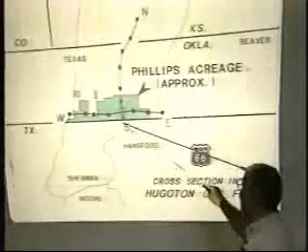This is a schematic of the Phillips acreage in the Oklahoma Hugoton. This is the Texas-Oklahoma line here, and this is the Oklahoma-Kansas line. The green colored area here is the Phillips acreage.

The geologists and log analysts ran some cross sections east to west and north to south, normally following a path where there are a lot of deep wells drilled in the region. So we picked a lot of areas because the deep wells had modern logs available on them. A lot of these other wells were drilled in 1945 and they virtually didn't run any of the modern suites of logs, so if we're going to do our work, we need something reasonable.

This is the region that we picked for our 12-section model study, about in the center of our acreage, plus the 12 sections, plus the sections all the way around had deep wells drilled on them. So we had logs available on all of the sections. We went one section on either side too, so you get to do the correlation work with regard to layering and so on and so forth.

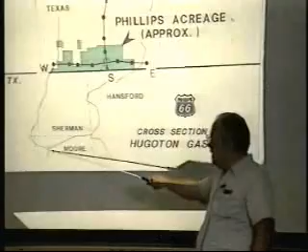This is approximately the end of the Texas Hugoton field. We'll get into that just a little bit. And then this dividing line, you get into the West Panhandle, which is also about the same age, and it's one giant reservoir where the oil rim has produced well over a couple billion barrels of oil, and the gas in place between the West Panhandle and the Hugotons into Kansas was over 70 trillion cubic feet.

I remember one day I tested a well down in the East Panhandle, and I had to test one up over at the Kansas line. I had to drive 250 miles. You get to test, and you have to get a couple of wells off test in the same day. It's that big.

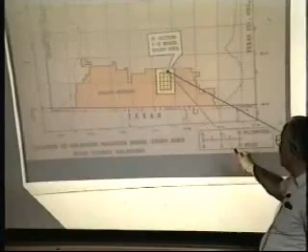I don't know if this is going to show up with the camera, but this is a little more descriptive of the 12-section study area. This is the region we studied with a model, but we also utilized data from a section all the way around. We also took a look at things being dominated primarily by the more permeable layer, and we checked the flow rates between wells on either side to make sure that the no-flow boundary was very close to the 12-section study area. I think it was about 1% off in total volume.

So the very first thing anybody's going to ask is, yeah, but if one well is no good, why is 12 good? Why shouldn't you study the whole field? It'd be impossible. But we did take a look at the no-flow boundaries by proportioning producing rates of offset wells, and it approximately confined it to the 12 sections.

This is a north-south cross-section from the Texas-Oklahoma line up across the Oklahoma-Kansas line, because we wanted to establish how much different the reservoir is in Kansas than in Oklahoma. The infill drilling was approved there, and we wanted to see if we could apply those results to Oklahoma. We knew that if we went to hearing and lost in Oklahoma, we'd have to go into Texas next, then the West Panhandle, then the Permian Basin, then the Gulf Coast—there was no end to it. This is why we got involved.

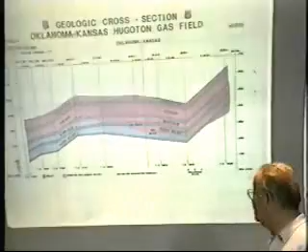The structure goes up into Kansas, so the layers extend up from Oklahoma. The Phillips acreage is down through here—there's approximately the Phillips acreage. As you can see, when we get down into our part, the Herington, the Krider, and a little bit of the Winfield have gas, about 5 feet. Every well we drilled, we tried to make a completion in the Winfield.

We perforated and did a light acid wash. If we got dry gas, we'd complete it. Ordinarily, when you acidize in there, you usually get water also, so we plugged it. But in our 12-section study area, 3 of the 12 wells were originally completed in the Winfield.

When you get into Kansas, some of these layers, like the Winfield, are completely dry, and then you get into the Fort Riley. What also happened in Kansas is the Herington up there—they never even perforated it, they didn't consider it pay. But the Fort Riley turned out to be their low perm layer. So they had their low perm layer on the bottom, and we had our low perm layer on top, which is the Herington here.

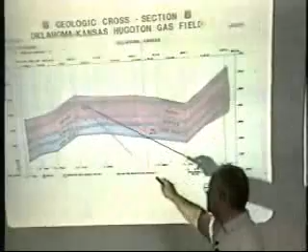The Krider is a good quality reservoir rock clear across Texas, Oklahoma, and Kansas, and even down into the West Panhandle, where they refer to it as the brown dolomite, which is also the best quality reservoir rock.

When you look at all these wells, remember, what would you have done in 1945 when you had maybe a dozen wells drilled in a confined area? This covers about 30 to 40 miles wide and about 50 miles long, and you've only got a few wells.

How are you going to assume that this shale—which now we have all drilled and can correlate on logs—was continuous everywhere? You could say, well, since I don't have that information, I'm not going to assume it. But when are you ever going to have that information except after it's all drilled and developed? This is why, in my opinion, you're obligated to make the assumption: I'm going to forecast this reservoir with the assumption of no crossflow, and see how bad it is.

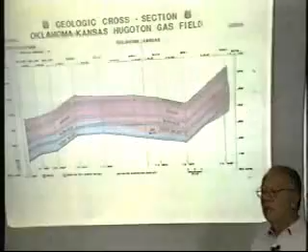It's not necessarily a disaster. Remember, it's the ratio of those two. It might turn out it doesn't make any difference, but as a reservoir engineer, I think you're obligated, particularly when you start to get involved and say you're going to improve your work by doing a sophisticated risk analysis approach to reservoir engineering.

Well, the risk is that there is no crossflow—that's the risk. And as you begin to study more and more reservoir performance, you find out that the majority of reservoirs have no crossflow. There's no crossflow. You can see that these shale barriers can be correlated across the whole field, all the way into Texas, Oklahoma, and Kansas. This is an east-west cross-section.

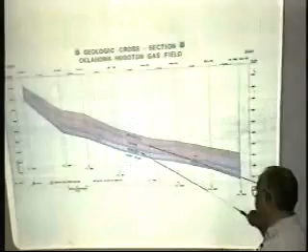You have the Oklahoma Hugoton field. You see we've got the Herington, the Krider, and a little bit of gas in the Winfield. I think there's an elevation difference here of about 900 feet. As you move in this direction, toward where the rocks start to get a lot of clastics in them, the quality of the reservoir starts to drop off. In through here, it's primarily carbonate, essentially dolomite.

When you go back and look at some of the testimony in Kansas, the geologists, in my opinion, were impartial in trying to do their work technically sound. You can see the same type of layering, and these black shale streaks correlate across the entire field. When you talk to geologists, they say this should be expected for carbonates.

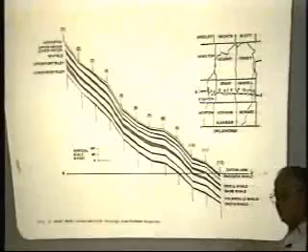It's a blanket deposition—it's cyclical, you don't always have the good limestone. You have some mudstones too in between. And again, 45 years, 300 pounds in one layer, 100 in the other. There is no crossflow. Zero. It's not small—it's zero.

There's a difference you have to remember. At one stage in reservoir simulation, everybody automatically used 0.1 as the crossflow factor, originally done to keep it numerically stable. When we took our gas model and tried to run it as a layered, no-crossflow model, it blew up. It wouldn't run, it couldn't handle backflow.

So you're creating numerical instabilities when you try to run these types of problems. I don't know if that was part of the issue or not, but we could not run the model in a layered, no-crossflow mode. It couldn't handle the backflow, and you can also get into trouble with a multi-phase system, like oil. So I'm sympathetic there.

But you ought to set up some runs with the gas, make some runs, play with it a little bit, and find out what's going on and how you can simulate the shut-in pressure. The shut-in pressure you're getting represents that of the more permeable layer, nothing else, and you can't extrapolate it.

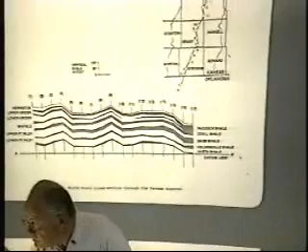This is nothing more than the cross-section. Looks like it's north-south on this one. Yeah, this is the north-south cross-section in Kansas. Well, they got one here, they show a little bit of a window, but you think, is your well over here going to see that window?

It's amazing what happens when you change a parameter in one well, in one layer, how it affects everything, everywhere all of a sudden. That was a big surprise too, because everything redistributes itself.

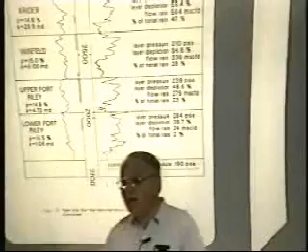Okay, here's an example of layer pressures obtained in Kansas by Mesa, Pickens. They're all for infill drilling, and they're all for getting a double allowable, because they really need the gas, really need the money right now.

Up in Kansas, the Krider—again, let's go through it methodically—the Krider, the Winfield, the upper Fort Riley, and the lower Fort Riley. The Krider has a layer pressure of 188 psi. The production log shows it's contributing about 47% of the production.

The layer depletion from the original shut-in pressure is 59% depleted. About 450 pounds was the original. The flow rate out of here was 564 MCF per day, which was 47% of the total rate producing from that well. The Winfield,

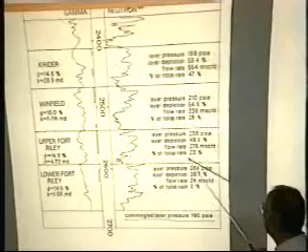210 psi—that's not a gas gradient, you can't get to that pressure on a gas gradient. Layer depletion about 55%, it's contributing 28%. The upper Fort Riley, 238 pounds, 23% of the total rate, about 48% depleted. And you get down into the lower Fort Riley, now it's only contributing 2%, and layer pressure is 284 pounds.

They haven't produced any gas from this well at all. They drilled an expendable well, went in there and took layer pressures and ran some flow meter surveys. So this is the pressure at a point, really, and there could be a gradient into that area. But this is only contributing 2% of the total.

This is their low perm layer, and you see the layer pressure here is 284 pounds compared to 188. So there's a 100 pound differential depletion, and again the original pressure is about 450. Well, they shut the well in then, after they ran all these, to get a commingled shut-in pressure. You get 190 pounds.

This pressure is invisible, that pressure is invisible, that's invisible—this is the only one that it is recording. If you do your material balance on a P over Z and get an original gas in place, what do you have? You're assuming that all these layers are 188 pounds also. That's where your error is coming in.

You have to see this. At times I wondered, when we've run production logs on the Ekofisk wells, or particularly after getting RFTs on wells, have we ever taken the opportunity on those wells after that to get a commingled shut-in pressure? It would be interesting if you have any of that type of data in your files, to really pinpoint and show what we're getting when we get a shut-in pressure on these wells, where you definitely have differential depletion.

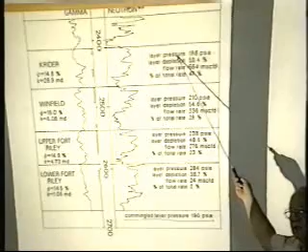Here you can see, without question, what it is: it's 190 pounds, just a few pounds higher. Now you've got to be careful, because this has probably got a -5 skin, since this is the more permeable layer—you stimulate it at the beginning. This is the one where you're going to get the good stimulation.

What pressure would you expect if that's a plus 50 skin on this? Now it's not going to be only 2 pounds above—you're going to have resistance to flow, the backflow into that layer, so it's going to be higher. So that could be trying to tell you something as a diagnostic tool too. What would happen if this one were on the bottom, and one of these was producing some water, and you shut it in?

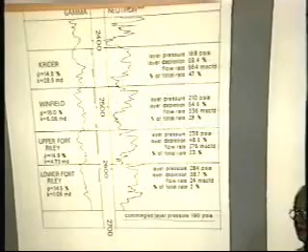You're injecting water into the reservoir, the best permeable layer, which could lead to some type of skin impairment or damage. Now, if it's Ekofisk, you'd just be water flooding in a sense, you know, be imbibing. But these are some things that you can start to consider.

Some of this phenomenon may explain a lot of things now that you go back, look at data, and say, hey, this ties into some of this layered no-crossflow effect. You go and run a production log and you got a negative 2,000 barrels a day, you know one of those layers is taking fluid, and you clearly have a case of differential depletion.

This is the Phillips expendable well that we drilled on our section, Buff number 3. We got these pressures by going in, we drilled an expendable well, did a very light acid, extremely light, just to make sure a few of the perfs were open, and then went in there with packers to get the layer pressures. The Harrington, I think this was roughly 1989, and again, original pressure over 450 pounds.

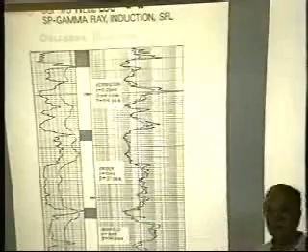The Harrington, 314 psi, the Krider, 121, and the Winfield, 141 psi. But you go on the original well on a section and you get the shut-in pressure of the well from the last official test, and it's around 120 pounds. So that's what we're seeing.

If you take a 72-hour shut-in pressure on a well where backflow is occurring in the real world, all you have to do is have the right reservoir model description, and you'll exactly match that pressure too, by shutting in the model. You don't need a buildup or a P-star or P-bar. You exactly match the pressure in the model exactly like it was taken in the field, and that's what we did.

You matched it by shutting the well in the model for 72 hours and flowing it for 72 hours to get the official flow rate test. Then when we match the back pressure curve or deliverability curve and the 72-hour pressure, then we have everything matched.

The whole material balance and the well deliverability and the well skins. And you need these layer pressures, at least one well on your study area, because you have to match this in order to get the volumes right. You have to match the layer pressure.

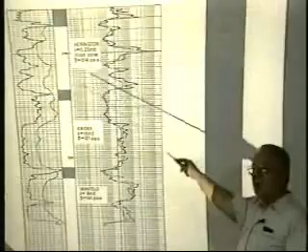And of course, you are getting RFT pressures from a lot of your wells, so if you're including that in your match, you're actually approaching what we did here. But wouldn't it be a lot easier if you could just shut the model in for a short period of time to match the spot pressure that you're taking? I realize that's a very complicated problem and you might not be able to do it, but you got to take a look at it.

This is an example of a Mesa. They drilled 5 expendable wells, shut in the original well, and started to produce the expendable well, then took data, had to report the pressure data to the Kansas Commission every month. I think this went on for about 12 years.

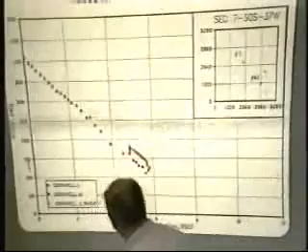This is equivalent to the P over Z versus cumulative on the number 1 well, approximately in the center of the section. This is the Mesa Cromwell number 1, and this is the P over Z line. They drilled this expendable well, the A1.

That was the original shut-in pressure they got on the well. That's a commingled shut-in pressure. It was higher, but only by maybe 20 pounds. Now they shut in the original well, and they started producing the other one. Look how it came down on exactly the same trend.

And now the original well, because it was shut in, this is the observation shut-in pressure on it. The difference between these two is a gradient, a flowing gradient, the pressure between these 2 wells. But did they add any reserves? They originally tried to claim that these high shut-in pressures proved they had added additional reserves to these infill wells, or replacement wells, but it's exactly following the same trend, and it basically represents the pressure in a more permeable layer.

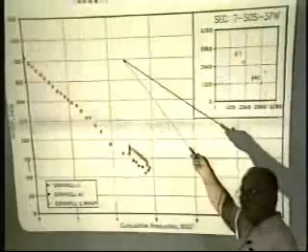You have to be aware they've drilled over 150 infill wells. Never, ever has any well ever come up to original pressure. Have they ever reported one that came in at 400 pounds or even 300 pounds? When they do, it's a non-reservoir or a non-commercial well. You could drill into an area of extremely low permeability, it just isn't able to drain, and of course you don't have a well. It's a non-commercial well if it's that high in the first place.

Very interesting example here, the advantage of new technology. There was a period back in about '64 where a lot of the companies were going in and re-stimulating or fracking wells out there. This is the original well. A back pressure curve, shut-in pressure squared minus flowing pressure squared versus flow rate, the 72-hour official deliverability test taken annually. All of the points fall on a common line, never changed.

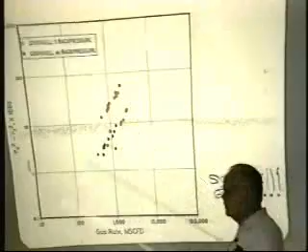So they moved in there and refracked the well. And that's how much they moved it to the right, okay? A lot of the original wells were kind of commingled, even open hole. We didn't go too much into that. But where you have to come out on this is the replacement well, or the infill well. You stimulated. If they hadn't re-stimulated the original well, what would you have concluded, comparing this original well on a section to this new well on a section?

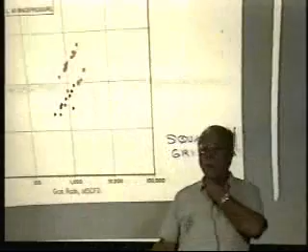It presented evidence to prove that infill drilling is good, okay? The new technology of stimulation is going to give you better wells. There are some operators, and I think I may have one in here, using big sand fracs, lots of fluids. You can compare those with the original, and they're way out here. One operator is creaming themselves because they're doing it on every well, and every well is worse than the original well on their infill well because they're using big volume sand fracs.

It would be easy to conclude, again, if they hadn't re-stimulated this well, that the infill well is obviously a lot better than the original. It's added new reserves, or the completion techniques are a lot better. It's not. If you'd plot the P over Z on that well with time, or the pressure with time, look what's happening.

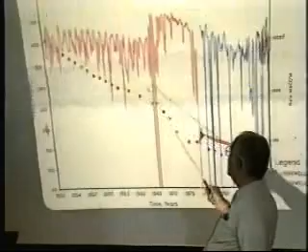This is the production curve before the re-stimulation. It cycles because of the seasonal swings. I think every gas field has that. They re-stimulated the well, it's going down. Well, they're producing at a higher rate. The 72-hour shut-in pressures are after a higher flow rate. They drill the replacement well. The pressure comes, or it starts out higher and it comes on with the very same trend.

But notice one thing that they were smart enough to do from all of their studies: the allowable is based on deliverability, which is strongly a function of the level of shut-in pressure, okay? Because the standard deliverability pressure now is getting real close to shut-in pressure, and the further apart you can get it, the higher allowable you will get, and you'll get a bigger portion of the total field production.

They suddenly discovered that well, they used it at the very beginning. Do you know what these gaps are between here? They're resting the well. When you rest the well for 3 months, what are you doing? In a layered, no crossflow reservoir situation, it may be shut in for 3 months to the surface, but what's it doing at the bottom of the hole? You're injecting gas from the low perm layers into the high perm, and the high perm is giving you the official deliverability, the flow from it, plus the shut-in pressure.

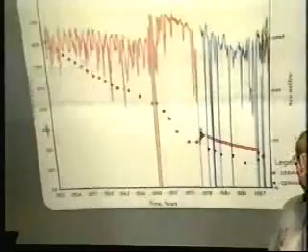Look at the 1 year they failed to rest the well, it is definitely lower than it was before. So at least they did all this work, and they really understood what was going on, and they used it to their advantage to increase their allowables. You shut in at the surface, you're flowing downhole, and they'd rest them about 90 days, then take their allowable for the remaining year at a different time. But they were able to increase their allowables by using this. The idea is you're resting, and you can see if they didn't rest, what happened.

We've talked earlier quite a bit about the Q max over the G sub I ratio, and we'll get into it. That's the potential of the more permeable layer over its gas in place, and the potential of the less permeable layer over its gas in place. That gives us the ratio.

If you substitute in terms of reservoir variables, it turns out that is nothing more than a ratio of dimensionless times, if you're used to that terminology in pressure transient analysis. The only difference is this is for a finite system, not an infinite system. The dimensionless time you're used to dealing with in pressure transient is for an infinite system.

The only control you have over this ratio is decreasing the differential depletion. Remember, it's this ratio that gives you the spread on the differential depletion on a P over Z curve. As the number gets larger, you get more differential depletion.

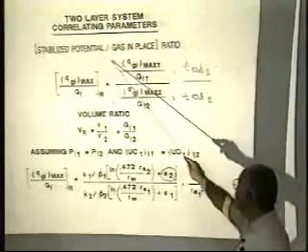If I multiply this by 2 and this by 2, it cancels. Differential depletion stays the same no matter what I do, no matter how many infill wells I drill. So the only thing I can do is get the largest negative skin I can on the low perm layer at the very beginning, because these wells aren't going to last forever. If I don't get it early, it's going out the end — you're going to leave it behind.

This is a good place. All else being equal, on a Q max over G sub I, I can have equal permeabilities — even if I put in a KH and a PH, the H's will cancel. So I can have equal permeabilities, thicknesses, porosities, and skins, and it comes out that I can have a Q max over G sub I ratio exclusively controlled by volume. So I don't have to have a permeability ratio to see differential depletion. We'll work through a real small exercise tomorrow to demonstrate that.

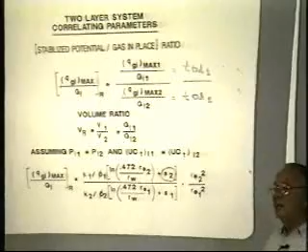With a 2,000-foot radius on this layer and about a 700-foot radius on this layer, I've got a 10-to-1 ratio. So be very careful of thinking that if I don't have the permeability contrast, I'm not going to have differential depletion type behavior.

There's a copy of a paper, layered no crossflow — what is the title of the paper, the first one we published? Depletion Performance of Layered No Crossflow Reservoirs is in your book. A lot of these equations are in there, an example. So you don't have to worry, other than you ought to take some notes along the way to remind you what to look at.

The conventional material balance for one layer is this, P over Z. You can derive it as 1 minus GP over G sub I. For two layers, though, we have a different system.

We have the cumulative production from both layers. You don't have to confine it only to two layers, but it's easier to talk about and understand concepts, so I keep it simple. Of course, when you're measuring at the surface, you're getting both, and you have no idea what the split is. And of course, the gas in place has got to be the gas in place of both. So only the entire system would give you a straight line, if you can get all of that information plus those two separately.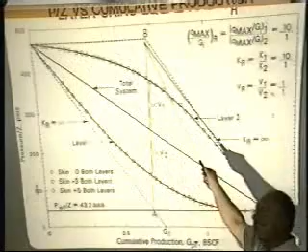If this is a real high perm layer, it's going to come down like this, and if this is low perm, it isn't going to produce anything. So it's going to be a horizontal line, and then I'm going to drop down after this one's depleted. The only production I can get is out of the high perm layer. The same concept—let's remember what this represents.

There's a copy of a paper that I think you're going to get, where Shell went to the commission, the Railroad Commission, and said, we have these stacked reservoirs like in the Gulf Coast. They may have several different reservoirs. Now, how do you want to produce it?

It's just like a layered no crossflow system. Oh, okay—some people are colorblind. Don Ebbs is, I know, you can't use red with him.

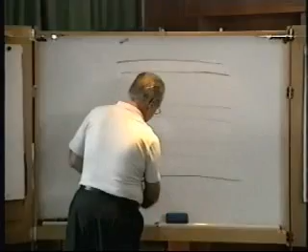One, two, three, four. There's a lot of these type reservoirs in the Gulf Coast. I think there's a lot of these type in Nigeria, where there's no question it's layered no crossflow because they're separated quite a bit. But what strategy would you use to produce these layers with time?

Well, what a lot of people have done in the past, they start at the bottom, produce those to its economic limit, and then they keep moving up.

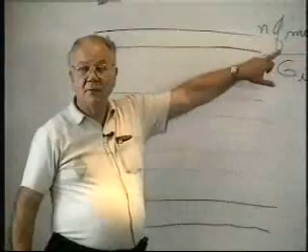Well, you could take this Qmax over your G sub I ratio, and let's just change it to one thing. Let's just add an N in there for number of wells, so that if we had one well in there, I got Qmax over G sub I, no problem.

What if, let's say at the beginning, I'm going to complete—I'm going to commingle these two. What would I do for these two layers while I'm drawing a P over Z versus cum for this entire system?

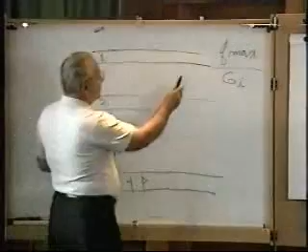Well, these two layers are going to be zero—I have a zero well. So I'm going to draw a horizontal line on the P over Z for the total system. I can actually generate a total P over Z for this whole system.

One of the things that comes out of layered no crossflow reservoirs is long producing times. This is exactly what you're going to have with this type system here. It may take you 50, 75, or 100 years to finally deplete all of these sands.

There's a paper in there by Shell about how they went to the Railroad Commission and they doubled the production from their gas field—the McAllen Ranch—by convincing them the optimum way to produce these type reservoirs is to commingle it.

And that gets back like the skin on a more permeable layer. You can represent the same thing. Instead of a zero number of wells, you can say I got a skin of 1,000 because I never perforated that layer.

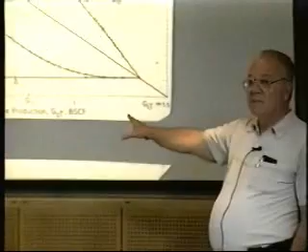Well, you're going to leave those reserves out of the end because the life of the well may not last that long. So these types of systems, if you sequentially come up, you're imposing a real long producing life on the wellbore. So the optimum way of really producing it would be to commingle it.

But when you start getting in the Gulf Coast and other areas, you have to be careful, because some of the high perm layers may develop water influx, water drive—strong water drive.

So just something to keep in mind: by the same logic, you can read that paper and start thinking about it. If you're going all through this and you recognize that a layered no crossflow system results in long producing times, that's exactly what this type of system does too.

Because you're not perforating all the layers at the same time. You're not commingling at T equals 0, which is what you should do to recover the maximum amount of reserves.

But this represents the volume of the low perm layer. And it's almost intuitive.

The smaller the volume of the high perm layer, the quicker the pressure is going to drop off the end of the table. So you're going to get that type of curvature.

Again, you can bound this figure by drawing a straight line from the initial pressure to the volume with a more permeable layer, and from here to here is the less perm, and you can draw the horizontal line and this line, and you've bound what this is going to look like, and you can sketch it in.

Very roughly, like I said earlier, the tangent to this thing is approximately pointing to the gas in place of the more permeable layer.

There's a rule or an observation that a lot of people have made with water influx in gas reservoirs, that because of the delay in the water moving into the reservoir, if you take that early pressure cum data, it will approximately extrapolate the original gas in place. That's for a single layer system.

Well, you have a similar type logic here, that those early shut-in pressures are trying to point in the direction of, you can at least get an idea, is it small or big? The smaller the low perm layer, or the high perm layer is, the more precipitous the pressure drop is going to be. And it could look like a very highly undersaturated reservoir too, because the pressure is dropping.

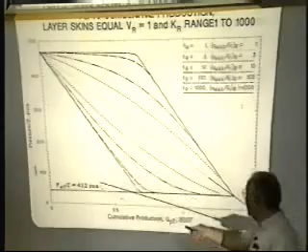Like here, you get 100 pounds in the more permeable layer here. The less permeable layer is going to have about 370 pounds reservoir pressure. And again, you can see how you've got hidden reserves that nobody knows is there because you're not getting that pressure.

There's no way that you can detect it, except you have to spend the time and effort to go in and get RFTs or layer pressures. Now, even there you have to be careful.

I showed you earlier something very similar to this. One case we ran is a constant rate and the other constant wellbore pressure. It's in the original paper that you should have in there.

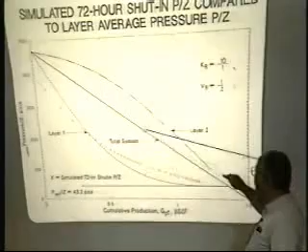Again, the 72-hour shut-in pressures have a tendency to be closer to the high perm layer, and the pressure is dropping off the end of the table. And again, this is for a 2-to-1 case. You've got twice as much volume in the low perm layer than you do the high perm layer.

Now, interestingly enough, this example is trying to tell you that there's potential rate sensitivity in a layered no cross-flow system. As Q approaches 0, which is, of course,

a ridiculous assumption other than to recognize that it is potential rate sensitive, everything else in this entire system is the same. If you're to produce the well at 175 MCF per day or 300 MCF per day, the volumetric average pressure in each layer is going to be exactly the same, independent of these two rates. But as you approach 0,

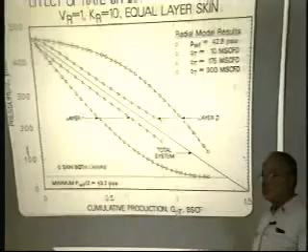you start shrinking the differential depletion in layers. As Q approaches 0, they'll both deplete equally, but it may take 1,000,000 years to produce it, of course. But we're just trying to introduce the idea that it can be rate sensitive, the amount of differential depletion that you see.

All I'm trying to do here, again, I think we discussed it before, is these very simple equations demonstrate very clearly that infill drilling in a layered no cross-flow reservoir will add no additional reserves, because the Q max over G sub I with 1 well, 2 wells, 3 wells is the same.

You cannot change the amount of differential depletion occurring within the layered no crossflow reservoir by infill drilling, by adding an additional well or two or three.

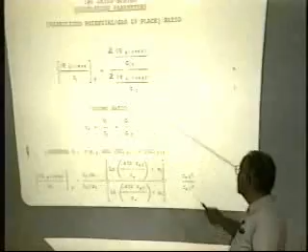It's really important to understand that, because it's real hard to accept as logical. It just doesn't make sense, but this real simple equation tells you why. That ratio determines how much differential depletion, and whether I've got 1, 2, or 3 wells, I can't change that ratio. But I can change it with skin on a low perm layer, which adds additional reserves. You've got to do it early.

You'll see in some of those papers where Shell did a water flooding paper, which is a classic on layered reservoirs. They show the differential depletion but don't recognize it as such. They clearly demonstrate all the original wells were open hole, thick carbonate, and they tried to get diversion in the water flood to get more equal distribution. They tried balls and it didn't work. They mechanically had to do it with packers. In our case, all our original wells in Oklahoma Hugoton, in Texas Hugoton, were with bridge plugs in between each. We separately stimulated each.

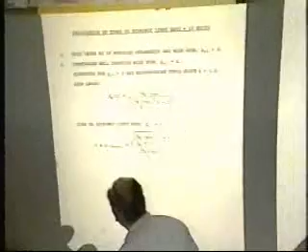It's actually getting the increase. We're going to, with this very, very, very simple equation, go through and try to demonstrate how you calculate the timing, and the economic rate of 10 MCF per day. Each layer is first treated as if it's produced separately, wide open. Again, we're just going to look at these equations and see what it's going to result in.

We're going to assume the commingled well production is going to be wide open. Each layer is going to have the same PWF. We're going to use this equation here. So the time to an economic limit is just rearranging this equation and substituting in an abandonment rate.

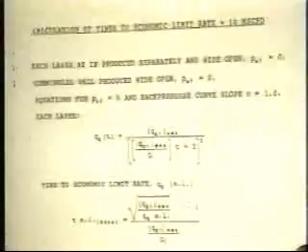I should have gotten into this early - how do you talk about abandonment pressure in a multi-layer system? You saw the P over Z's. What is it? What does it represent? Well, nothing. I don't even know how to get there from here. You see the total system P bar for each layer.

Let's go back to that for a second. How would you discuss abandonment pressure? Is it this pressure? Is it that pressure? How do you get it? What does it mean? It may mean something with regard to a single layer system, but what does it mean on a multi-layer system? It means absolutely nothing. Everything's approaching this anyway, so whatever line pressure I set is going to look like an abandonment. So you really can't talk about abandonment pressure in a layered, no cross flow system because it doesn't make sense.

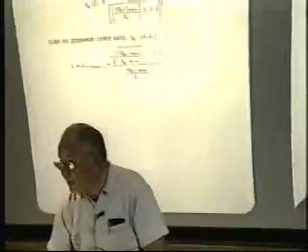You don't know what to talk about, but abandonment rate or some economic rate - that makes a lot more sense. And that's how we ended up really doing our work with regard to the model, was to look at abandonment rate. All we're doing here is rearranging this equation and substituting in for QGT an abandonment rate, and we checked with the field, and 10 MCF per day is the current one.

So we're going to use that, and we're going to calculate how long it's going to take for us to get to an abandonment rate of 10 MCF per day for each layer individually. And then we're going to do it commingled, and see what evolves out of that.

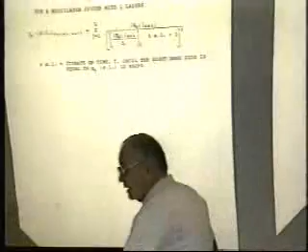Well, the only reason I'm going to introduce this is, okay, now what are we going to do for a multi-layer system? Instead of one layer by itself, it's just a summation, really, of each of these individual layers, to where the sum of all layers is going to equal 10, if 10 is the abandonment rate.

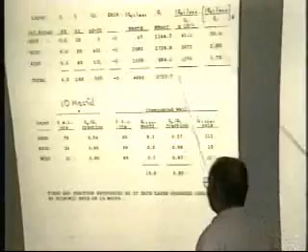But because, which gets back to the idea, the low perm layer is gravy. You should not be forced by anybody, by governments or what have you, to say you got to spend all the money in the world to go after this one too. That's a plus, it should never end up to be a negative or a minus.

Say, well, look at the high pressure in there, you're abandoning at 211 pounds, you should do something. In the layered no cross-flow system, you can't do nothing about it.

So the fraction recovery at this time would be 54%, even if you'd abandon it in 78 years to its economic rate, you only recovered 57%. But in the Krider, you would recover 95%. In the Winfield, you'd recover 90%.

But if I calculate now the time to an abandonment rate of 10 MCF per day for the commingled well, it's going to take 89 years. I've gone from 24 years for the Krider and the Winfield. Now the whole system to 10 MCF per day is 89 years.

The tail's wagging the dog. The low perm layer is what's kind of setting this. But this gets back — layered no cross-flow reservoirs that have this contrast are going to have long lives, 89 years, at the abandonment rate of 10 MCF per day.

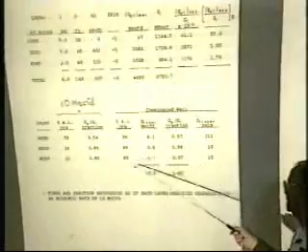But look what's contributing. At that time, in 89 years, I'm getting almost all the production out of the low perm layer, 8.5 MCF per day. I'm only getting about 8/10 out of the Krider, 7/10 out of the Winfield. But there's my 10 MCF per day.

That's my abandonment rate. This is why you look at these problems in terms of abandonment rate, there is no such thing otherwise. And at the time of abandonment, 10 MCF per day for the commingled well, I'm still only going to recover 57, 98, 97. But look, I'm going to leave 211 pounds in there.

You go through the same exercise and multiply this by 2, 2, 2, and go through, you end up the same place. You shorten the time, you can shorten the time, but the pressure that you abandon the system, that's identical.

And I think we have some example, I don't know if it's the next overhead.

It'll come later, I'll show you though. We're going to use this very simple equation for the model, using the model gas-in-place and just summing up each individual well's absolute open flow potential. We can calculate within a year the abandonment times for each of the layers and the abandonment rates for the 12-section model study.

With this very simple equation, you're running the model for 120 years. So you're just trying to realize that you can analyze layered no cross-flow reservoir behavior very simply by using these very simple rate-time equations. And regardless, even though I'm using PWF as zero and all kinds of simplifying assumptions, and I'm very rigorous in the model, I get the same answer.

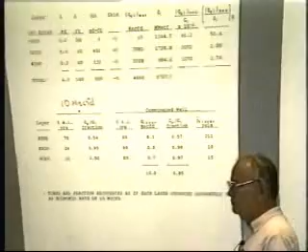On this commingled case, after let's say 23 years, do you expect the recoveries to be just about as on the left side there? Yeah, you can see here that we really haven't added that much more by going from 24 years to 89 years for the two good layers.

If you commingle after 23 years, it would be opposite. No, this is all commingled. I just did this to demonstrate: if I produce them separately to 10 MCF per day, remember, when you're producing at a constant wellbore pressure, they're totally independent of each other. It has nothing to do with whether you're commingled in a tubing or not. Absolutely nothing.

I'm just trying to demonstrate each one individually. If I had each layer by itself, what would it do to 10 MCF per day? How long would it last?

I tried to point this out earlier. You've got to really think. Don't confuse yourself into thinking that if you have separate completions, you're going to change anything. You're not.

Because each layer always has the same flowing pressure, exactly at the same time. It's hard to get over this concept. I think his question was whether, if you had cross-flow, would it then look like it is without it. No, I didn't interpret it that way, because I get this question all the time: if I had separate tubing strings for each layer, would it make any difference?

No, it doesn't change anything. Now, other than that you'd never develop this one, it would never be commercial. That's where you're heading. You'd never develop that one. That's what I meant when I said this is gravy. I'm going to produce these anyway; I'm just adding this on as gravy. It should never be considered a negative.

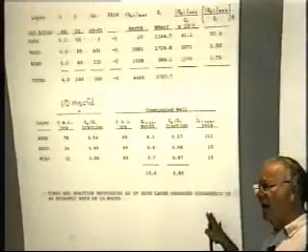That's why it's really nice to look at this whole problem this way. You get real bogged down when you start looking at everything as a constant rate. I can't make it any clearer than presenting it in terms of a constant wellbore pressure.

We'd have never solved the problem if we hadn't gotten into the rate case first, because when we get into the Guymon-Hugoton approach, it is a constant rate case. What ends up happening, like I mentioned earlier, when we go on decline, is the volume ratios that I would have had at the beginning have changed when I start on decline, so my decline exponent is going to be different because I produced at a constant rate.

And we'll even show you with the model, if I had produced the field wide open from the beginning, it doesn't change the long-time behavior. It's still a long time because it's layered, no cross-flow.

There's a lot of new content here. I know this has got to be overwhelming, trying to give all these concepts at once. But again, we're talking about them, everybody's being introduced at the same time. You can talk to each other, you can go away later. All this stuff is in that book, and if you read and understand it all, you're going to have 38 years of experience.

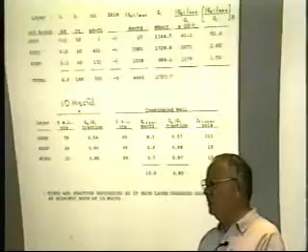I said that earlier kind of as a joke, but it's not entirely a joke. This is a real hard concept, just like it's almost incredible to think that you can drill an infill well in a layered, no cross-flow reservoir, and you don't get any more reserves. It just doesn't make sense.

You can run the problem forever on a model, okay? But when you reduce it to these very simple equations, you see exactly why this is true, and then run them all, you find out, by golly, I'm getting the same thing. This is part of the reason I think nobody really grabs onto this concept, because it is difficult, and you have to work through some problems. You have to be involved, because you'd never sit back in your chair and dream this situation up. You have to solve a problem, and then all of a sudden things start working.

We were lucky for two reasons: we were working with single-phase gas to keep it clean, which is always an advantage, and we were working with a reservoir producing virtually wide open from the beginning, with rate-time data. That's the only way you can get a B-value. We started talking earlier about ARFs. You can't get a B-value in excess of 0.5 for any analytic type of system you could dream up for a single-layer system. It does not exist beyond 0.5, and you have to get into the layered no cross-flow, or its equivalent, the composite.

Remember, I tried to take the layer and turn it over. I can have an areal case, it's going to give me the same type of logic I have to follow. If I wanted two fault blocks, which would be sealing, to deplete at the same rate, I have the ratio Q max over G sub I. If the geologists give me the gas in place of each fault block, and I have an average well, I can calculate very quickly how many wells I have to have in each fault block for the pressure to deplete equally.

There's a little exercise here I think we'll go through later. If I wanted the Herington to deplete exactly the same as the Krider, how many wells would I have to drill? Well, I've got the Q max over G sub I, and I put in number of wells, and it turns out I'd have to drill 29 wells in Herington for the pressure to come down to the same values as we deplete it, while I have only one well in the Krider and the Winfield. I can't afford to spend that kind of money. Somebody should not force me to make the pressures equal. That's what it would take: 29 additional wells drilled in Herington to come out with the same abandonment pressure all along the line in time.

For this type of layer, would horizontal wells have been considered? The easy substitute, as earlier in our session, is to use a -7 skin and see what you get. It's not going to be much better than a -5, is it? It'd be about $1 million then, wouldn't it? Like I said, you have the equation, just work through it and put a -7 instead of a -5. You can calculate how it would change any of these numbers.

A -5 is a very good skin, and we're going to get through that here. I'll show you the values we got from these original tests. We were fantastic. In 1945, we got -5.5 skins on all these wells. We ran pressure buildups on some of these wells in the study area in 1989. Guess what? Same skins as they were in 1945.

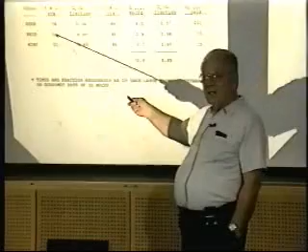What about the time to reach pseudo-steady state? It doesn't make any difference. For the low perm layer, the time to reach pseudo-steady state is about 3 years. In this other layer, it's about 3 months. The difference in answers you get, including or excluding transient, doesn't change it. You can't plot the difference, because its rate is so small compared to these other rates.

It's a good question. I heard this question raised at a school or seminar given here before, and it was being misinterpreted. I already looked at that in the model, it doesn't make any difference. So how low perm would you ever consider doing infill drilling in a gas reservoir? Now, if you take this along as a separate thing and remove it from this as a separate thing, you might look at it differently, okay?

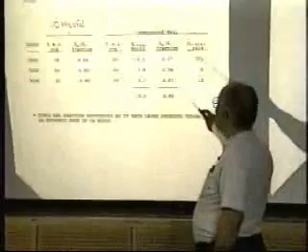If I don't have an economical well by infill drilling and accelerating, including the Krider and Winfield, there's no way I'm going to get an economic well by completing only in the Krider. We ran the economics for drilling an infill well on every one of these sections in the model and completed in all 3 layers. It is not economical. If it's not economical at the stage we're at where these are producing the majority, it sure isn't going to be.

We even looked at the effect - how much more would it produce? Because if we complete it only in here, the sandface pressure is going to be so high we'll get a higher deliverability. We don't even pass the transient, and we're already below the calculated increase in allowable that we thought we might gain.

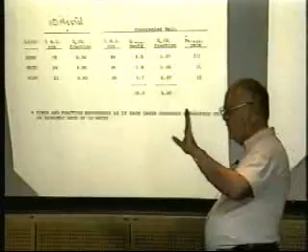There's a lot of things in this real little example. That's a very good question about a horizontal well. Again, put a -7 in there. RW prime is equal to half the drill length of the horizontal well divided by 2. Put a 4,000-foot horizontal well in the problem and go substitute the skin. And that's even saying you have zero damage as a result of the drilling. It's a pure, good -7, -8 skin even. Run through the exercise, it's real easy to do.

What would you do? How do you drill a horizontal well? Because this was raised as an entire issue from one standpoint. If you drill a horizontal well, where would you drill it? Would you drill it in the Herington layer only? Well, you're not going to get any more production out of the Krider and the Winfield if you only locate it there. So then you say, let's drill an inclined well.

Once you drill an inclined well, look at the maximum deviation of an inclined well through all 3 layers. It's about a -3.5 skin. You're no longer getting the skins of horizontal wells.

I think Standing has this figure in his book up there at Trondheim showing the effect. If it's not in there, I know Ramey had it - the effect of an angle theta of a slant well through each layer, and you might say that's equivalent. The most you can get is about a -3.5 skin with a high angle well through each layer. You don't get a -7 out of it. You can only get that by confining it to a single layer, and then that well won't drain the other layers.

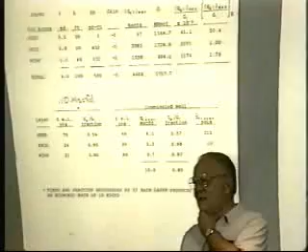You might say, yeah, but this is unique to Kansas. I'm saying it's not. When you start reading the literature and looking at layer pressures and differential depletion, it's the rule, not the exception. I followed the horizontal literature quite a while, and the French were the ones really pushing all of this early on, and they started wondering why. There's a paper they published where they finally admitted why their calculated increases expected on some of these projects weren't happening - it's because they had layered, no cross-flow reservoirs.

You locate that horizontal well in that layer, and these two other layers don't even know it exists. Okay?

That was a good question. I think it was appropriate because it really belongs in the layered, no cross-flow reservoir discussions. But if you have that, you better be very careful where you locate that well, in which layer.

And you can calculate it. Again, like I said, put a -7, -8 skin on that. You see what it'll do, you see how much more. That's all you've got to do is substitute one number into the radial flow equation to calculate that.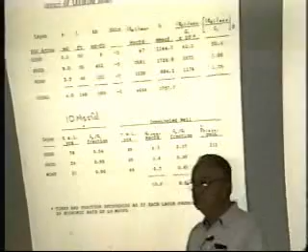You might be able to do it by ratioing, approximately. What would you think that would increase the number to? Your 49, it wouldn't double it at all, would it? Or the 47? Well, either way, you can do it.

A part of our study was to look at the history within the Oklahoma Hugoton of replacement wells. On here you'll see where we looked. We did a lot of work to try and solve the problem of what was going on.

Our study area, the 12-section study area, is outlined in blue. We have a little blue section here where we drilled a replacement well, because the original well was wet, and a lot of replacement wells were really completed mainly because of a deep test down to the Morrow. So it was dry, and we came up and said, let's see if we can make a better well in the Chase formation, and that's what happened here. A lot of these are probably that, where deeper tests were drilled and we came up to see if we could make a better well.

You can see they're scattered all over the field. This region up here is Mobil territory. Cities Service, I think, is out in this region, and Phillips is down here. We're going to look at 5 replacement well performances.

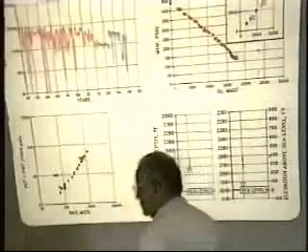You may not have this in there, or if it's in there, it may be somewhere else, but that's beside the point. You'll see this was the original pressure versus cume on the original well number 1. This is the replacement well drilled practically 2,000 feet away on the same section. As you can see, the pressure cume didn't even change a pound. So obviously this is in real good communication with that, and that's a pressure cume.

This is kind of reflecting the in-place, primarily the more permeable layer. In this area, we just have the Herington and the Krider, so it's primarily the Krider. We had to put a pumping jack on the well, really. It wasn't any drier than the original well. So there was a pumping jack on there to pump water, and that's the result of the increase. We increased from here to here, but primarily due to the pumping jack.

When you plot the deliverability on the well as compared to the original performance back pressure curve, you'll use this as a performance measure. You can see a couple official tests run that were way off to the left of the curve, and we got a poor test, and our allowable probably suffered because of that. Once we put the pump jack on, this is a new well at a different location that was stimulated. It must have about the same identical KH and skin over 2,000 feet away. Okay, that's the conclusion you draw from this.

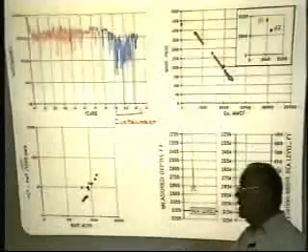I'm trying to point out here, this is the period that the gas production in the states was curtailed. You can see the curtailment. Again, in our model, during the period that they reduced the rate, we had backflow going on between layers within the model, because of the cutback, or the increase in back pressure.

This is the original well up there, and this is the replacement. Some wells were replaced because of casing leaks too. There was a Glorieta formation, which is real salty, up maybe about 1,000 feet, and we got a lot of holes in the casing that way. But you can see the P over Z versus cume. Initially there was a little bit of rise because of the gradient, but within a very short time it was right on the same curve. So no increase in indicated original gas in place.

We have a sketch out here showing how the wells were completed. This is the Herington, Krider, Winfield. This may even be lower, and here I think we only completed within the Krider, or Mobil did.

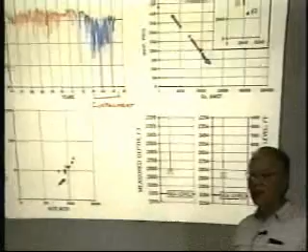And I can tell you all those wells were open hole, and we thought we had a bird nest on the ground, that we were going to go in there and offer to buy those wells from them based on the assumption they were going to do the evaluation on this P over Z and their deliverability. We did all the legwork and groundwork, was ready to go to management, but decided to update the study because it was about 8 or 9 months old. Went in and discovered that if they go back to these original wells, they were all completed open hole. Commingle stimulation, they were able to increase the deliverability 4, 5, and 10-fold. We'd already figured out that with potential open hole completions, you commingle stimulation, you got a bird nest on the ground with a layered, no crossflow reservoir to stimulate the low perm layers. And they figured it out.

The number 2 well was slightly better than the original well. The back pressure curve, your point shifted slightly to the right, but again nothing dramatic. It's what you'd expect, no indication.

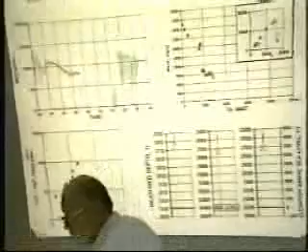The Cities Service, Tenneco, Enns, Wallace, Enns number 1 - it's one of those wells that was drilled. This is the original, replacement 1, replacement 2, this is the P over Z, between 1967 or 68 roughly, and 1981 there was no production. They tried an infill well here. It wasn't commercial, they just abandoned it. They put this on, that's 30 MCF per day. That's not a very commercial well.

The deliverabilities are always coming out about the same, but between 1967 and 1981, without any production coming from the lease, the pressure dropped from roughly 300 pounds to about 170 pounds. You don't have a commercial well. Rock quality poor, just like you might draw these pods and so on. But what happened when there wasn't any production from the section? Oh, it was being drained. There's no pods.

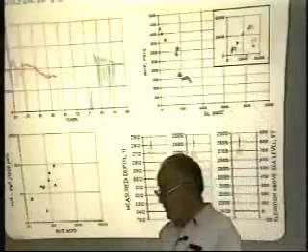This is a real dramatic example. They tried different completion, you could make a commercial well. I don't have them identified, but I think that's on the west side, the Cities Service side. With the same thing, the Panhandle Eastern Fletcher, which is on the east side.

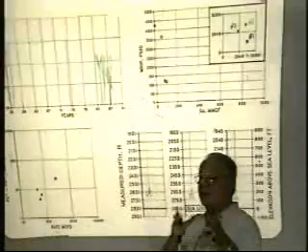Or the reservoir, well this is even more dramatic. There's the first well, and the second well in blue was drilled. The first well wasn't commercial back in about 1956. The next well was drilled in about '74, and then finally somebody tried again. That's 100 MCF per month. Okay, divided by 30, what are you going to get? Possibly the farmer was using this for irrigation gas, or maybe to heat his house, or his outhouse. There probably wasn't even enough gas for that.

But between 1956 and 1983, shut-in pressure declined on this well from 360 pounds to about 120 pounds. And you don't have a commercial well.

Is it being drained? Is there any additional reserves due to infill drilling? Are there pods out there? There's obviously a big change in the quality of the rock, but does that mean there's additional reserves due to infill drilling? That's one of the problems with that type of cross-section, highlighting in color the poor quality rock and the better quality rock. It almost implies like you go drill, you're going to find these pods, you're going to get additional reserves. Well, here's a pod.

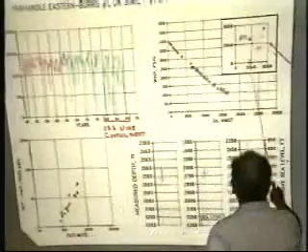And this is a well in the center. The Panhandle Eastern Burris is roughly in the center. And as you can see, there's the original well, a replacement well. The fact it's so close, it was probably one of two things, either a casing leak or they drilled a deep test and it was dry, and they decided maybe to see if they could make a better completion. Then they drilled another well which is a lot further away - I guess this is the final one. As you can see, there's no difference, really no difference in production rate, no real difference in P over Z versus cum. These three wells are basically following the same trend, and the well deliverability is the same - no improvement resulting from replacement wells or so on.

All right, now I'm going to show you one here that I'd like to present - everything that we've learned.

We looked at 30 of these wells. They're down in the Texas Hugoton. I'll show you later.

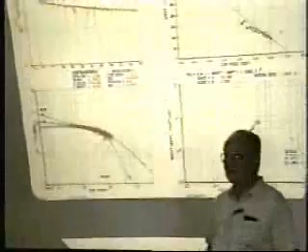Because we were operator down there in Texas Hugoton, we were taking our gas out a lot faster than people were out of Oklahoma, or the people in Oklahoma were taking out faster than out of Kansas. So the Texas Hugoton went on decline. The wells went on decline back in '73, even earlier. So we had a period that we could look at now after we understand what's going on, purely rate time data out of the Texas Hugoton without doing any more studies. We looked at your 30 sections down about 7 miles south into the Texas Hugoton.

This is out of Dwight, so we don't have all the data. We could have gone to our files and supplemented, but you can see the curvature in the P over Z. The deliverability isn't that much different, and you can see a B value in the rate time of about 1. It's an expected decline exponent at this stage of depletion that we should be expecting to see in the Texas Hugoton. So we know it's layered, no cross flow too, just like Oklahoma and just like Kansas. It's the same formation, it just extends for literally hundreds of miles, layered, no cross flow, hundreds of miles. Not a few miles, but hundreds of miles.

Now, I'll start with the end before I get started at the beginning. These are the conclusions that we drew out of the work we did for the Oklahoma Hugoton, and then you take a break and get back again after lunch.

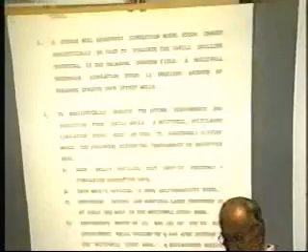The following observations have been made from Phillips Reservoir Simulation Studies of the Oklahoma Hugoton Field, and these may or may not be in a paper. Again, we've got 5 papers.

First, a single well reservoir simulation model study cannot realistically be used to evaluate the infill drilling potential in the Oklahoma Hugoton Field. A multi-well reservoir simulation study is required because of drainage effects from offset wells. Normally, if you had a single layer, you could look at the offset wells and say, well, if I proportion the rates between these wells, I could set no-flow boundaries, and I can run a model, and I can draw some conclusion. But I've got 3 layers, and I don't know what the rates are in any of the 3 layers. So I can't proportion R sub E's in each of the layers. So I can't solve the problem on an individual well basis.

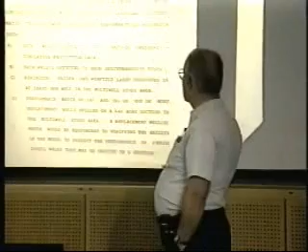To realistically predict the future performance and production from infill wells, a multi-well, multi-layer simulation study must be used to reasonably history match the following historical performance of reservoir data. And this is what we're going to go through this afternoon: each well's official test, the shut-in pressure, and the cumulative production data, the P over Z versus cumulative production, each well's official 72-hour deliverability, and of course that's going to lock us in on a KH and skin.

The Herington, Krider, and Winfield layer pressures in at least 1 well in a multi-well study. It's a classic example where you say, well, I get a match, but it isn't unique. When you match those layer pressures, you've now made it unique. You can't get any other match but that. Without the layer pressures, I could get a big range of values, and I'll match the deliverability and the P over Z versus Q. But once I have to match the layer pressures, then there's only a single answer. So this starts to get into the uniqueness of a solution with a model. You give me the layer pressures and it's unique if I match the layer pressures.

The other thing we had to do was see how close we could come to matching the replacement well on that Strat lease that was located about 2,000 feet away from the original. If we can do that, that's equivalent to drilling an infill well. What we ended up doing really was we didn't change a single number of the KH distribution that we had for each layer from the original description. We used the same skin there as the original well, got a perfect match without turning a knob on a replacement well on the Strat. So we figured we got it locked now. We had a unique match and we matched everything. We'll get into the details this afternoon of the model study. Any questions at this point?